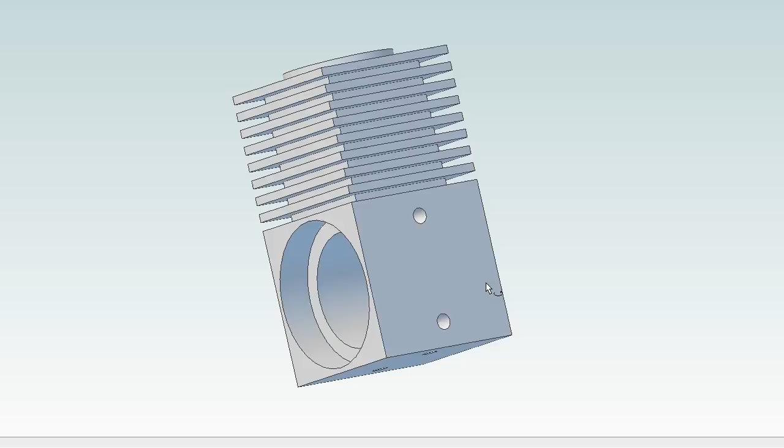When I work on a project of this type, I like to get the most complex parts done in the beginning. That way I know I was able to solve the most complicated problems, and it actually makes the rest of the build go easier.

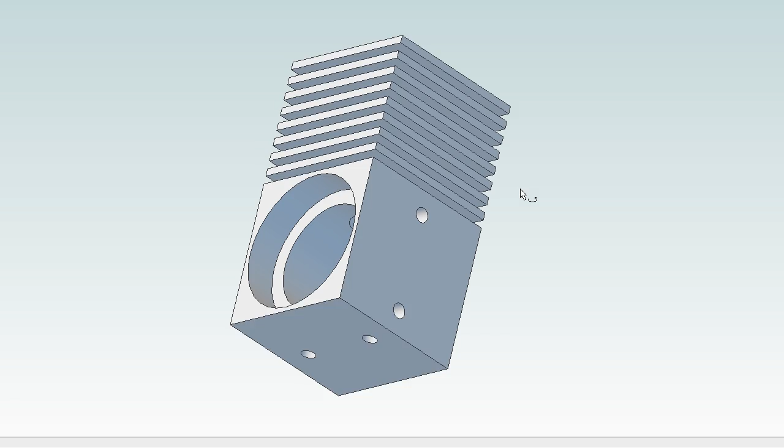Anyway, this is the cylinder block, and it's one of the most complex parts, only because there are so many operations that have to be done on it. It's roughly a 1 inch square and a little less than 2 inches tall. Clearly, there are some boring operations that have to be done from both sides.

These holes are drilled and tapped for M3 screws. There's more boring that goes on through the top. And then there's really just a visual item here, this little raised part.

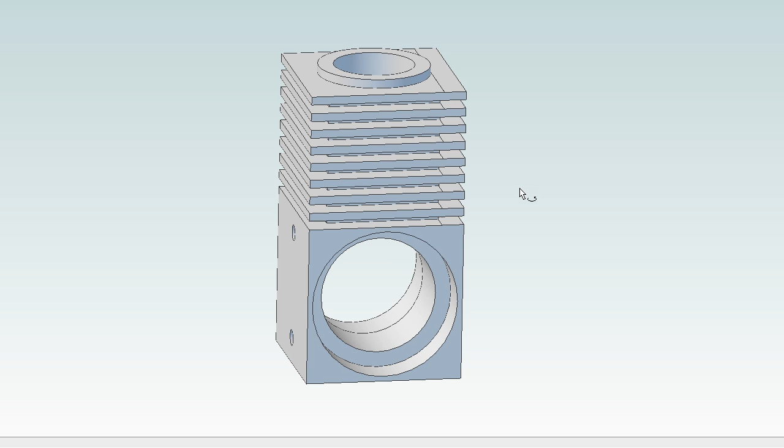So my thought process is that I'll begin by taking some raw stock and using my fly cutter to square it and cut it to the final dimensions of this piece. And then I'll go ahead and just drill and tap the 6 holes that need to be put into it.

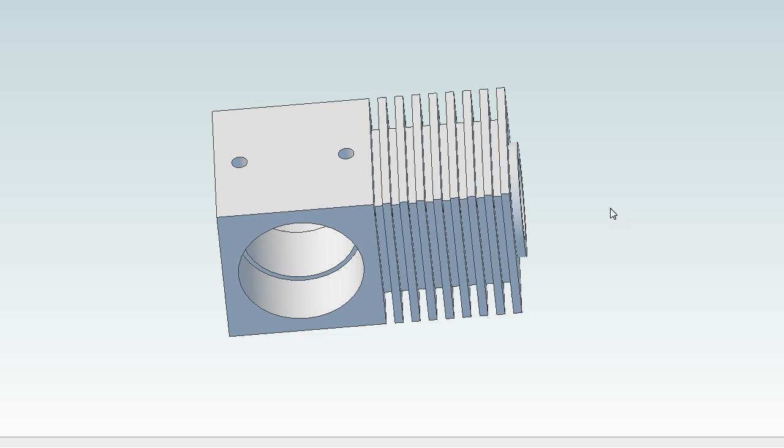Then I think the next thing I'll do is mount this on the lathe in the 4-jaw chuck, which should be interesting. I've never mounted a square piece of stock and tried to center it before. But I think that's the best way to cut this feature here.

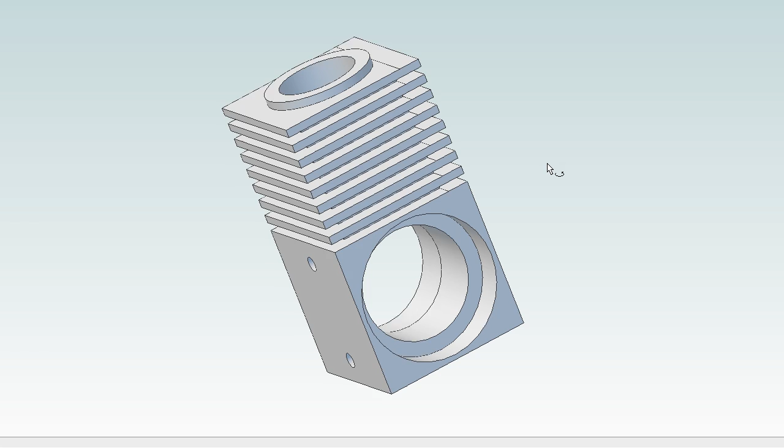Once that's done, I'll go back to the mill, and I'll show you this from the section view here. I'm first going to drill this inner hole. That just comes in through the top, and that's what lets the air come in through the cold cylinder here into the hot cylinder.

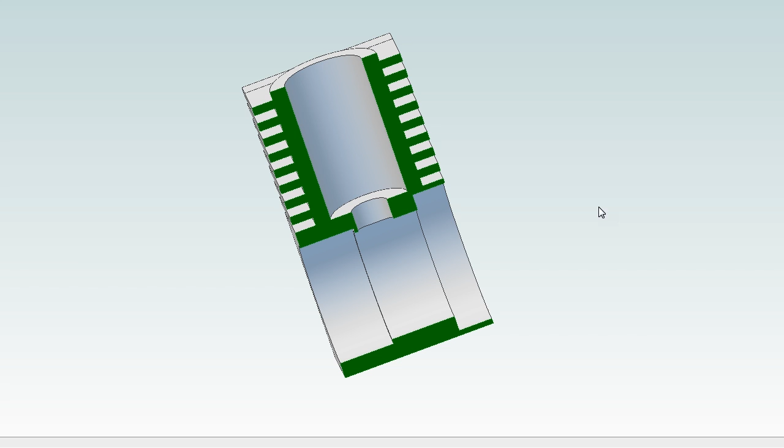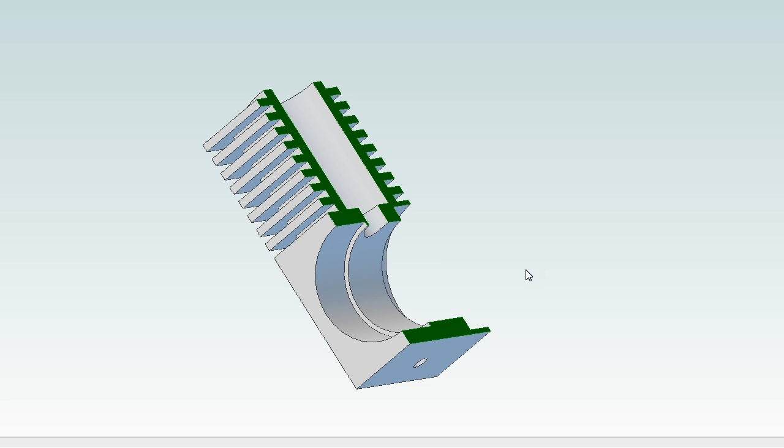Once that's been drilled, I will bore this out to size, and this has to be fairly tight tolerances because we're going to be machining a piston that comes through here. Then I guess I'll flip the piece over, drill out the hole all the way through, and then bore this to the proper dimension.

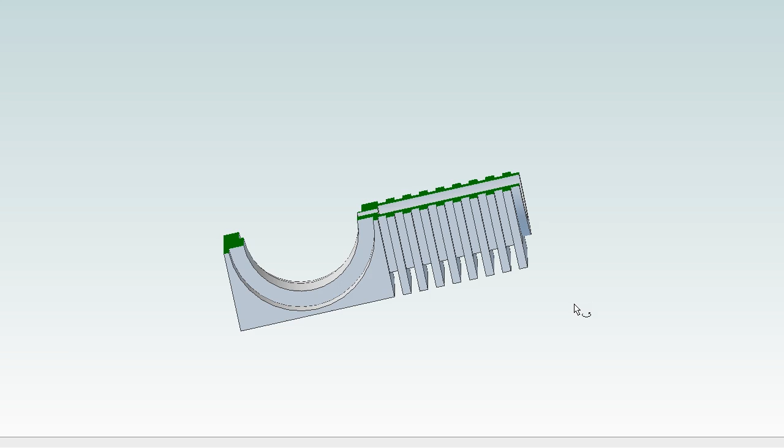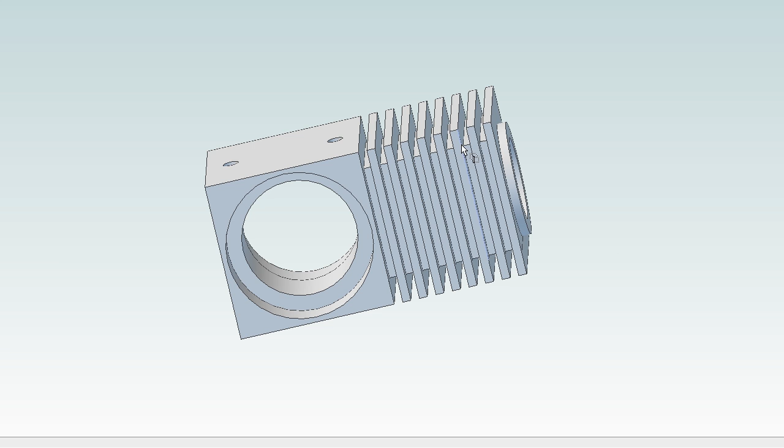And then whichever side I have up, I will then bore the next step here. And then we'll flip the part and bore that last step. The final thing I'll do is cut these fins. The gap between these is only 55 thousandths. I think what I'm going to do is buy a tiny 55 thousandths end mill and just mill each slot, and then flip the block and mill the next ones.

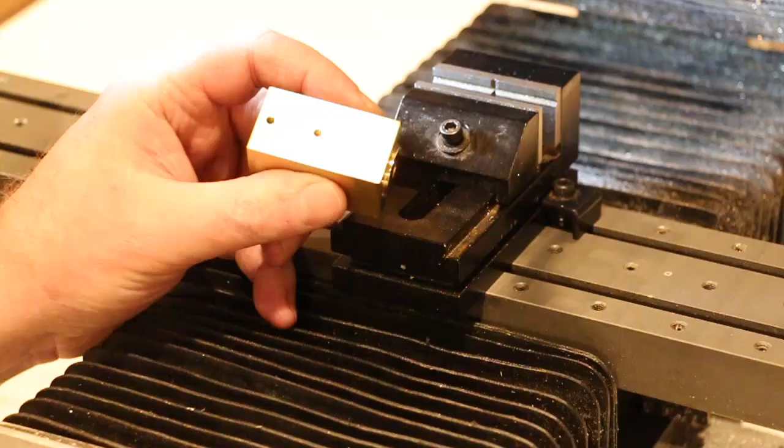So that's my plan. Let's head off to the workshop. I've been working on the cylinder block. So far, what I've done is I've started with a raw piece of stock that was oversized, and I used my fly cutter to square the block and then machine it to the final dimensions as called out in the plan.

Then I drilled and tapped some holes for the screws that will mount this to the helicopter. In this series of videos on the helicopter, I'm not going to take you through the operations that we've seen so many times, like drilling holes and tapping them and so forth. I'm going to concentrate more on the more challenging or interesting parts.

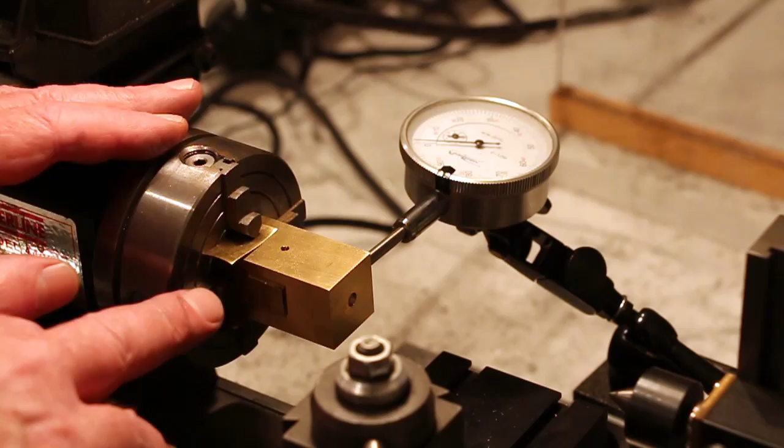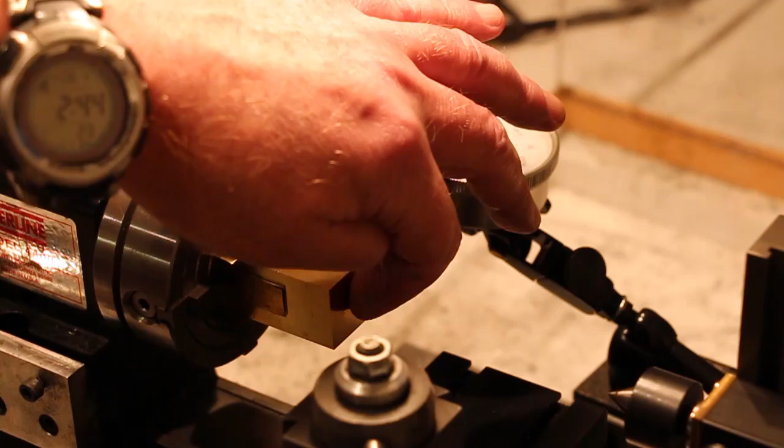The first of which is that I machined this boss on top of the cylinder block, and I did that on the lathe. Alright, what I'm trying to do now is get the cylinder block aligned properly in the four-jaw chuck. And if you recall, I center drilled a hole on the end to make that process easier.

The problem is I was yapping too much and I didn't correctly set the XY coordinates, so this hole isn't really in the center. So it's not going to allow me to do what I wanted to do. But I'll show you the technique anyway.

What you do is you line up a center point here. I happen to have this. It's actually the extension arm for the Sherline tailstock, but you could machine something like this. All you need is a true round piece of stock that has a point on the end that you can use.

And then, rather than doing what I'm trying to do, which is align a square, you can just put your indicator on the round stock and indicate it the same way you would a round piece of stock. It's a really simple way to do it. Unfortunately, I messed up.

So now I have to indicate off a square piece, which is still doable, but certainly not as precise. I'm not sure that you can actually see the reading on the indicator, but I'm going to set it to 0 here on this side, and now come around to the opposite side, and that's within about 2 thousandths.

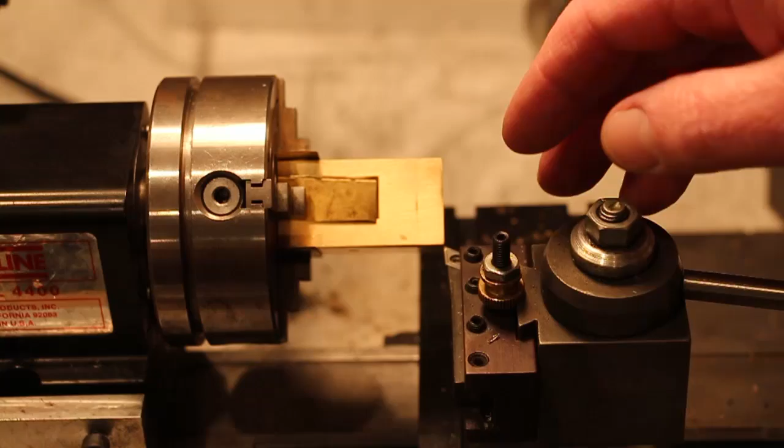All right, I've begun to do the setup here for what we're going to do, which is come in 55 thousandths of turning and leave a raised cylinder here. The finished diameter of that cylinder is a little over 0.7.

So it's almost impossible to know exactly where you are when you're working with an odd-shaped piece like this. So what I did was I brought the tool in so it just touched here and marked that as Z0. And then I brought it in until it just touched the side here.

And I set that so that the X dimension is essentially equal to what would be the diameter of this part if it were round. And then I brought the tool back out far enough so that it clears the piece, because we're going to be doing an interrupted cut here.

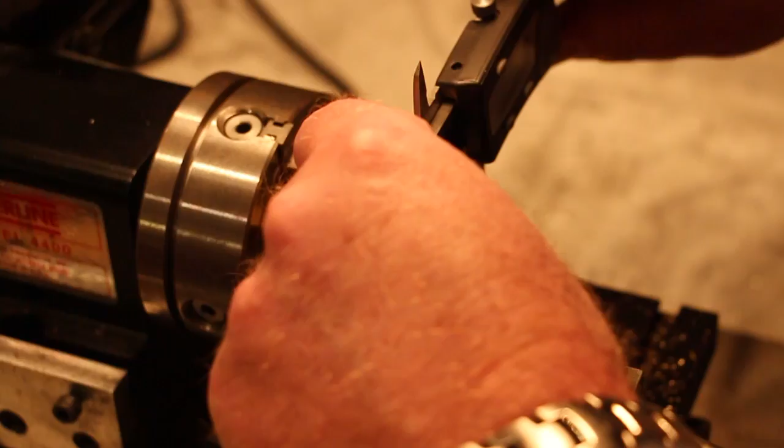It's doing the finish pass. All right, so now we have that little cylinder there, and the machine thinks that that's 0.72 in diameter. It's very close. It's measuring 0.728.

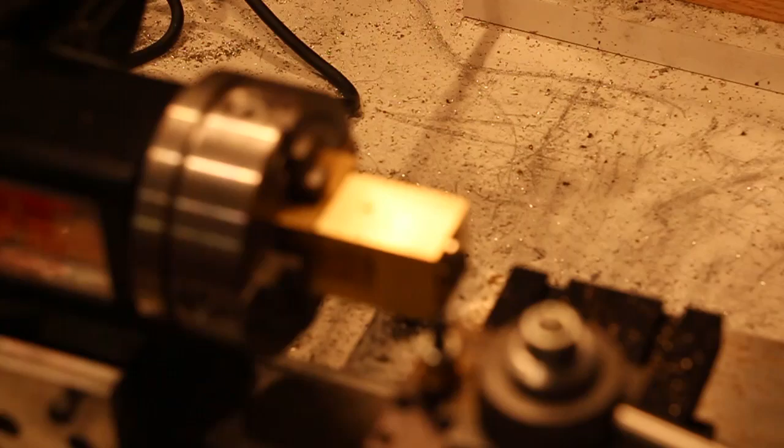So that means my guesstimates on where the bit was were only off by 8 thousandths. So what I do now is I'm going to bring the bit in to where the machine thinks 0.72 is. And now I'm going to go to the DRO and tell it that that is actually 0.728.

All right. So now I'll go in and modify the G code to pick up from that point. All right, so we'll just continue from there. Simple.

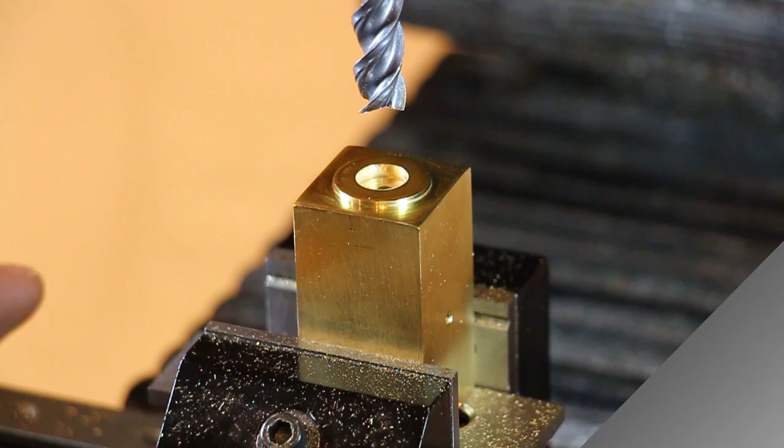As I mentioned before, I accidentally put my center drill in what was not the center of this top surface. And unfortunately, my milling machine doesn't have an undo key. So I have to figure out how to undo this myself, and what I've decided to do is just take a 3/8 inch flat bottom end mill and mill down into this, to the middle of this hole here, until I have removed the mark that was left by the center drill.

And then that will leave me with a flat surface that I can then use a center drill on and properly set up to do the drilling operation here. So what I'm doing is I'm going to go very slowly, feed rate of about 0.5, to try to find the bottom of that.

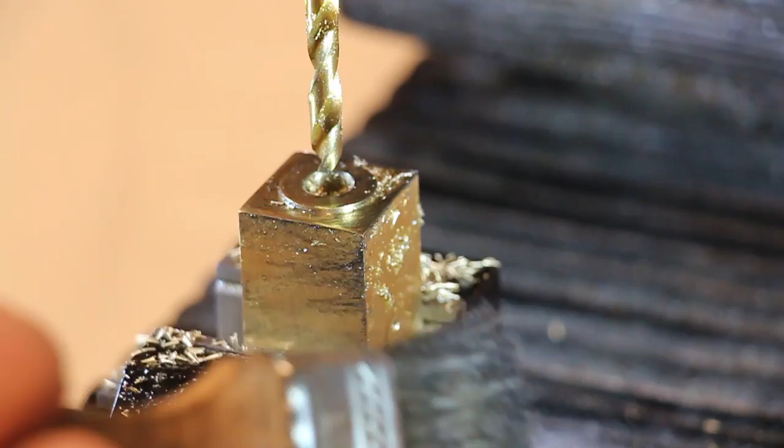All right, that's all we needed to do. So now the next hole is for the piston itself that has to go through this cylinder. So this has to be drilled out to the size of the cylinder, which is just a little over 1/2 inch. And by the way, that hole does not go all the way down. That hole only goes to about 0.9 into here.

The way I'm going to do that is just gradually use larger and larger drill bits until I get close to the hole size, and then I think I have a reamer of the proper size, and we'll just ream that. Well, it seems I'm having just one of those days. I told you that this hole here has to be 0.512 in diameter, and I have drill bits to take me up to that point, and I have a reamer that'll put the final size in here. What I didn't realize, because I don't normally drill holes this size, is that I don't have a drill chuck that'll hold those.

My drill chuck is only a 3/8 inch chuck, so I was only able to get up to a 3/8 inch hole, and the reamer also has a shaft that's larger than 3/8, so I won't be able to use the reamer either. So I've switched over to my boring tool here. The issue with this is that most of the tools you run on the mill, you know what size they're going to cut. Obviously a drill bit, an end mill, and so forth. This doesn't work that way. With this, you have to sneak up on the size that you're working to. So it's a matter of cut, measure, and don't cut too much until you get to the right point.

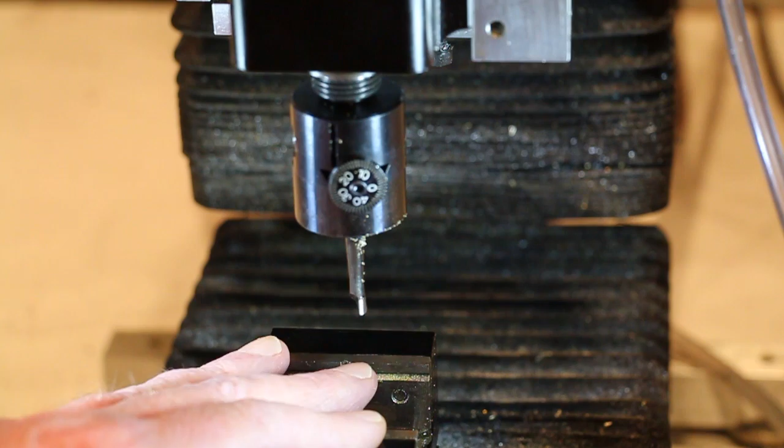Through the magic of video, we've just time traveled 24 hours into the future. The video you were just watching of boring that hole, I realized later that I couldn't possibly have been adjusting this correctly. It was just too cumbersome. So I did some research last night and found the proper way to set the boring head. So I'm going to skip over the way I was setting it, which was incorrect, and when we cut the next part of the cylinder that also uses the boring head, I'll show you the proper way to do it. So now we're going to go back to the past, and I'm going to show you the finishing step on the part we were just working on.

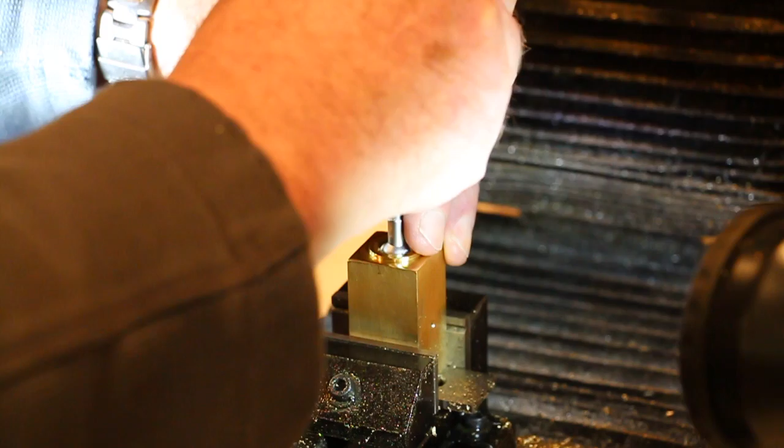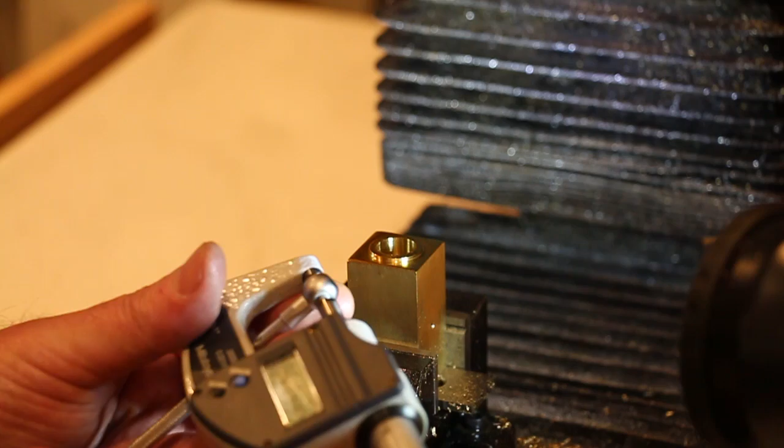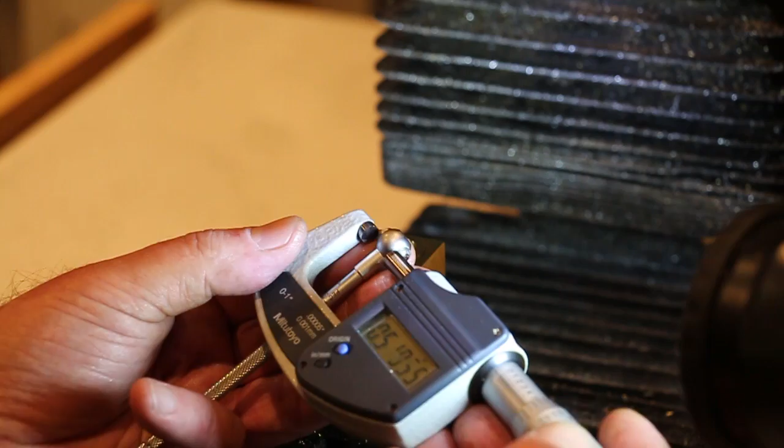This is a hole gauge. Get it down in the hole, make sure I'm perpendicular, and then I lock the spring here, and I just sort of tilt it out. Wow. Well, I guess Murphy's having an off day, because this is within 0.002 of what the hole was meant to be, and 0.003. I'm going to call that close enough.

And the reason is I have to machine a graphite piston to fit in this hole, and it's much easier on the lathe to turn to a specific diameter than it is to mess with this, because we're trying to remove a thousandth or two with the boring head. At least I know there are people who can do it. I'm not one of them. So I'm going to leave the hole as it is, and I will simply make the piston a thousandth or 2 thousandths larger than is called for. That's not going to make any difference on the working of the engine, and that works for me.

All right, I've flipped the part and put it back in the vise. This time, because I have to go all the way through the part, I put a piece of black ABS plastic underneath so that I don't bore into the vise.

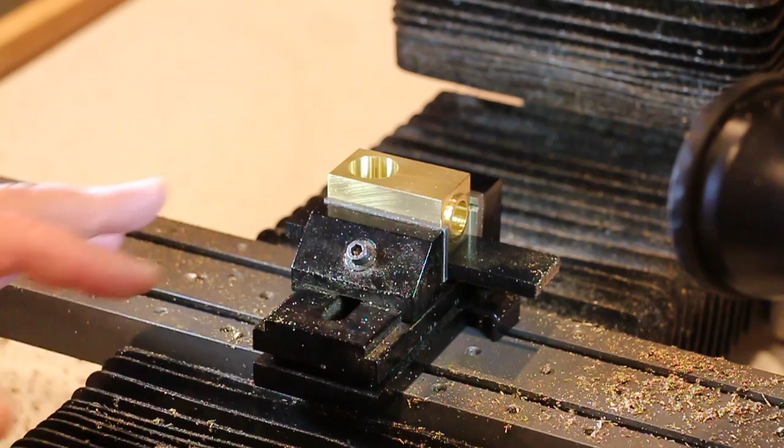All right. Well, I've continued the boring operation, and I've now gotten down to the final diameter, which I'll measure in a minute and show you. I had started off by taking 10 thousandths on a pass, and I cranked that up until I got up to about 20 thousandths, and that worked just fine. So I was comfortable taking 20 thousandths off on a pass, and then when I got closer, I backed off just to sneak up on the final diameter.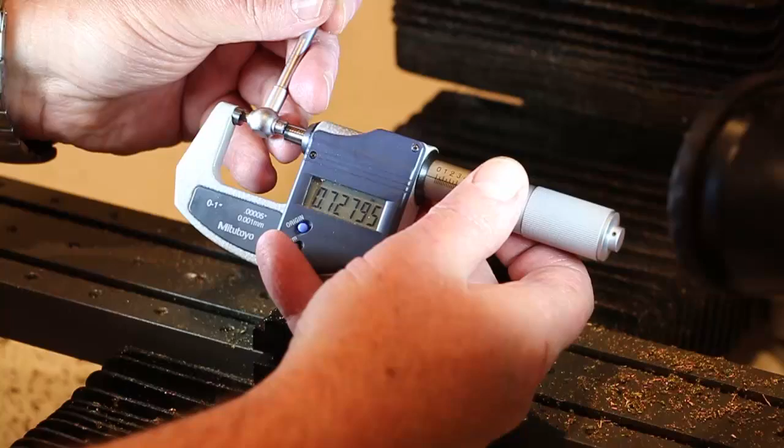I'm measuring it using this spring-loaded hole gauge. You put it in the hole. You make sure you're perpendicular to the piece. You tighten this. There's a spring inside, and then you just angle it out. Yeah, that's 0.728, which is exactly where we wanted to be. This is just not the best way to be holding this thing, but trust me, I did measure it off camera, and we are where we need to be.

So anyway, that hole is finished now, and it's through the entire part. The next step is to come down and make a recess. We want to drop down 0.354, making a recess that is 0.787. Just checking the plans here. Yes, 0.787. So the idea is we're going to enlarge this existing hole, but only down 0.354.

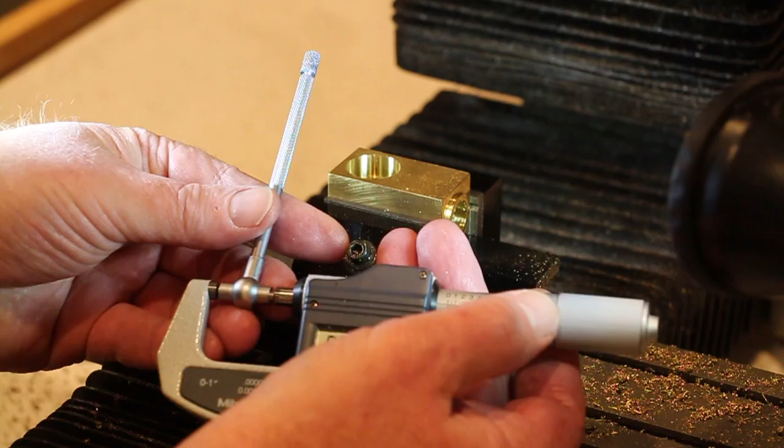All right. Well, it seems I went just a wee bit over. That's measuring 0.789. 0.787 was ideally where we wanted to be, but I'm not worried about that. Obviously, what annoys me is that I haven't really figured out how to get exactly where I want to be with this tool.

But for our purposes here, we're going to be machining on the lathe a part that press fits in here. So it really doesn't matter. This actually could have been any dimension, as long as we matched it with what we turned on the lathe to press fit it in. So being within a couple of thousandths is good enough for this. But I'm still going to work at trying to figure out how to get more precision out of this.

All right, I've flipped the part over because now we have to bore a recess that's quite big. It's 0.925, I think.

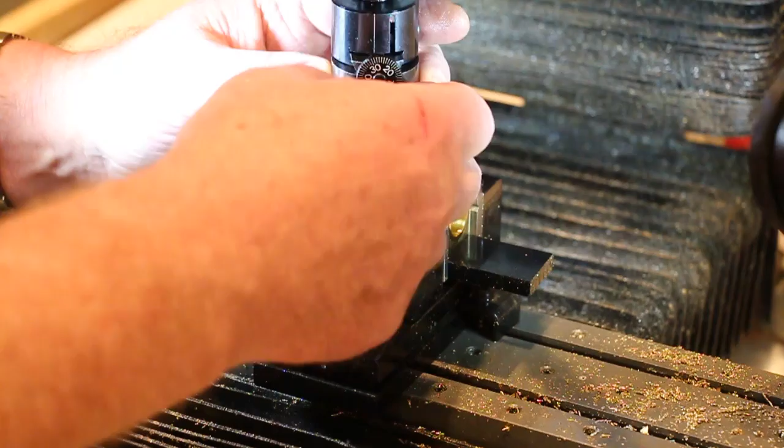The problem I just realized is that I am at the maximum diameter that the tool can cut in this configuration. I mean, that's not a problem because you can flip this around to get much bigger holes. But the problem is that in doing that, this dial moves way out here, so this line is going to become much less useful than it would have been in the other configuration.

So, I don't know what the solution to this is, but I am going to have to work from this configuration in order to get where we need to be, which is about there. So anyway, let me get this all tightened down and set up, and then we'll get started. Off camera, I'm going to start to enlarge this hole, because you've seen that enough times. And when I start to get close again, I'll start filming again.

All right, I'm getting very close now. I just took a measurement, and I have 17 thousandths left to go. Even though there's quite a distance between this dial and the scribe line that I put in here, I'm getting better at it. What I'm going to do now is try to remove, let's try 7 thousandths. Let's see if that really is 7 thousandths. Because even though it's better, it's still very difficult to see exactly what that is reading.

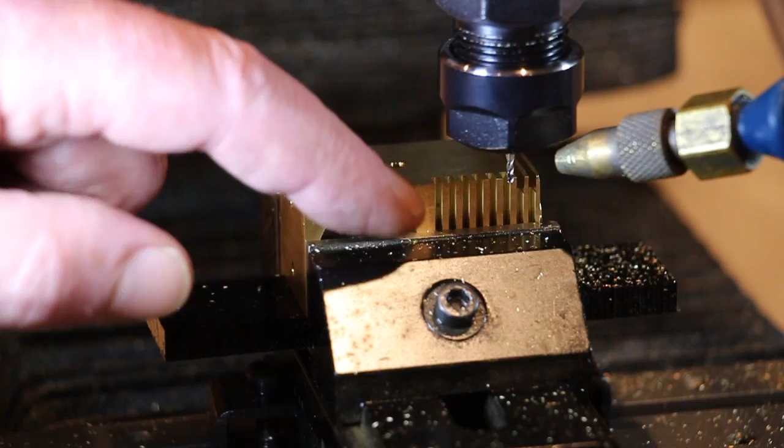I've begun doing the last machining operation on the cylinder block, which is to mill the fins to create the heat sink. I've already done one side, you can see that there. And now what I've just done is flip the part 90 degrees in the vise, and I've begun to cut the next set of fins. I'm using a 55 thousandths end mill, which is tiny. So I'm making very shallow passes. I'm only taking 20 thousandths off on a pass. And I'm only moving at a feed rate of 1.

I've got a week invested in this part, and I don't want to rush now and make a mistake. Plus I don't want to break this very delicate and expensive end mill. So I'm just taking my time. I'll start it up and let you see how slowly it goes. And then I'm running just a tiny amount of air through the nozzle here, just to keep the chips out of the way, so I'm not recutting the same chips.

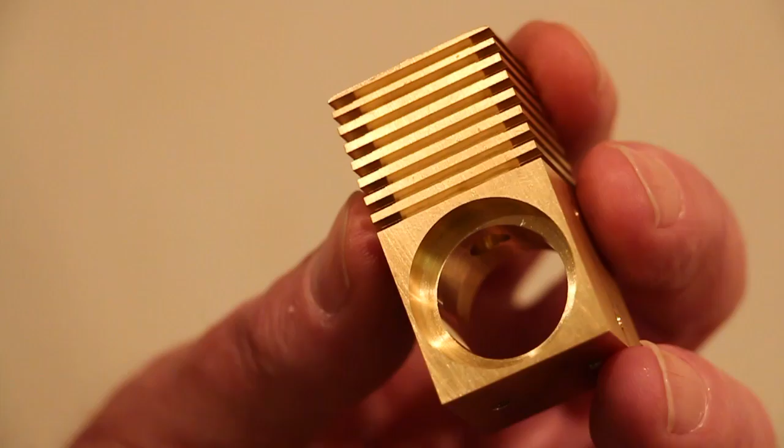Here's the finished cylinder block. Well, the fins are complete. Well, obviously everything's complete. That's why we call it finished. All the boring that we did from both sides, and the bore from the top with the air hole passing all the way through. So it's time to move on to the next part.